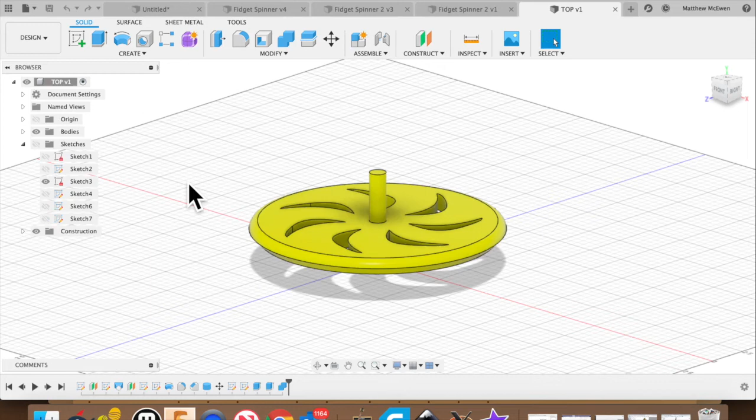Another Fusion 360 tutorial. This is a really pretty simple one as well, using a couple of tools you already used. This is a top, and we're going to produce this in 2 parts.

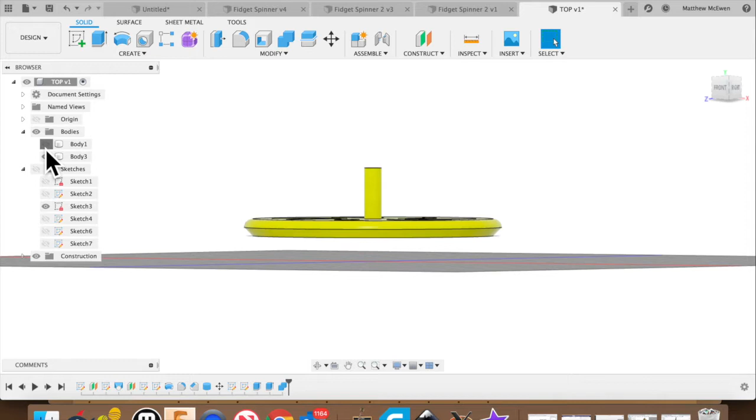We're going to have the tip where it spins, and because we can't print this all at once without it creating a bunch of supports, since it would be floating there, we're going to print this part flat, and then we can turn the tip over and glue it to it. So we're going to print it in 2 parts.

So let's get started. File, new design. Turn on your origins. I'm going to flip it around so I can see the front, the bottom construction plane, and I'm going to start with a cylinder.

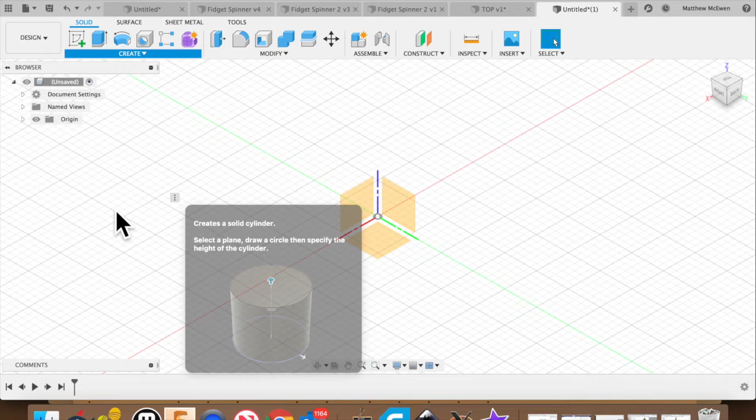There are many ways to do the point, but I'm going to start with a cylinder. I'm going to put it right in the middle, and let's say it is 10, and I'm going to make it a centimeter high too. Say OK.

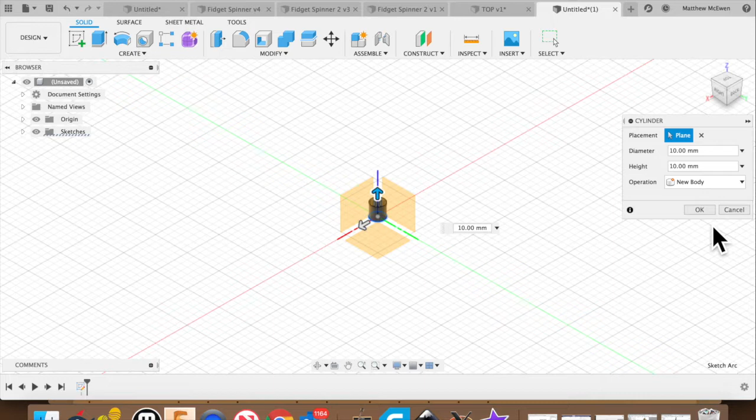Now I don't need my origins right now, I'm going to turn them off. Now this is kind of a way you can trick it. There are many ways to make a point, like a pyramid or a cone, but this would be one of them.

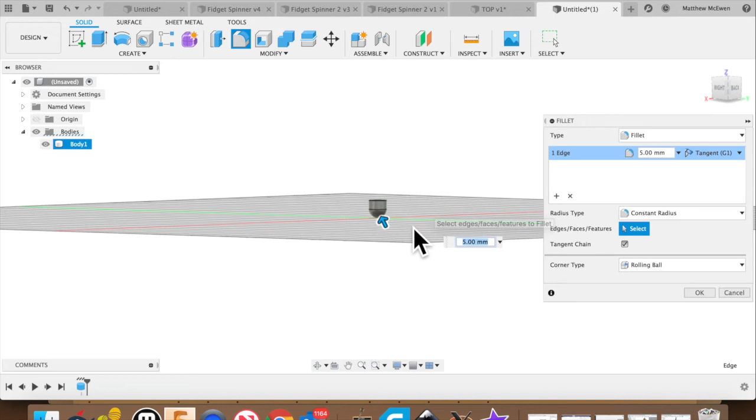You get in there and we'll just fillet it. Oh no, maybe not a fillet. Not a fillet, we're not filleting it. Cancel, we're going to do a chamfer.

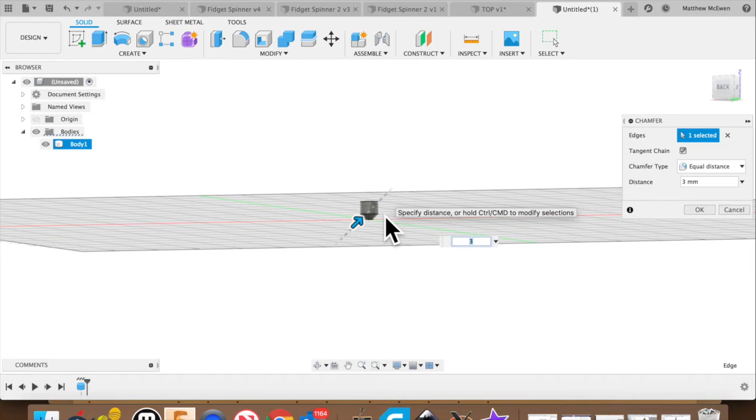Let's try that, let's go into 3. You just have to check, that's not all the way in, gotta get closer, it won't let me zoom in. There we go. So let's try 4, 5, 5 — 5 millimeters on that gives it a nice point.

It's good to go, this piece will glue onto the bottom of that. So the next thing we need to do is create a sketch, and we're going to create the sketch on top of this.

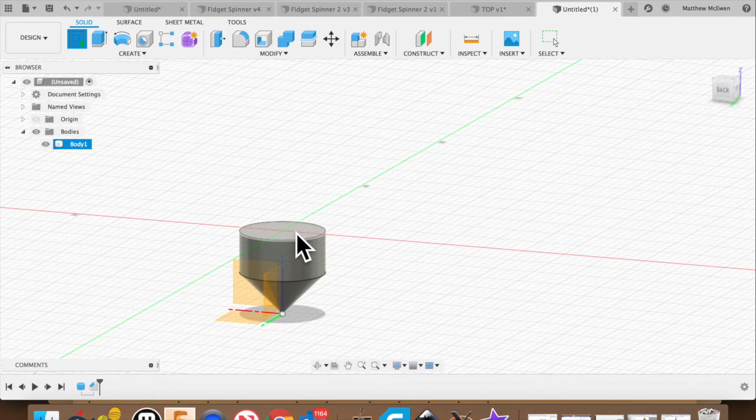Flip me around. You can create a sketch of any type for this top. If you wanted to, you could create a crazy shape, something like that, or just a circle, or a rectangle, or a square. You could draw it freehand.

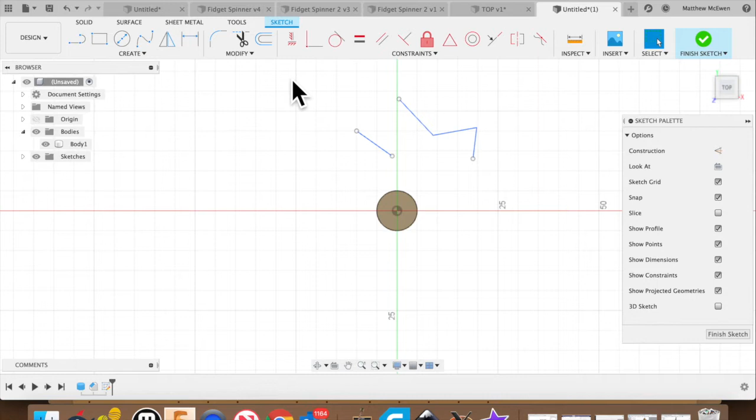The way I'm going to show you how to do it is just doing a circle. Here we go, we come up, let's go out, let's make it 50 millimeters.

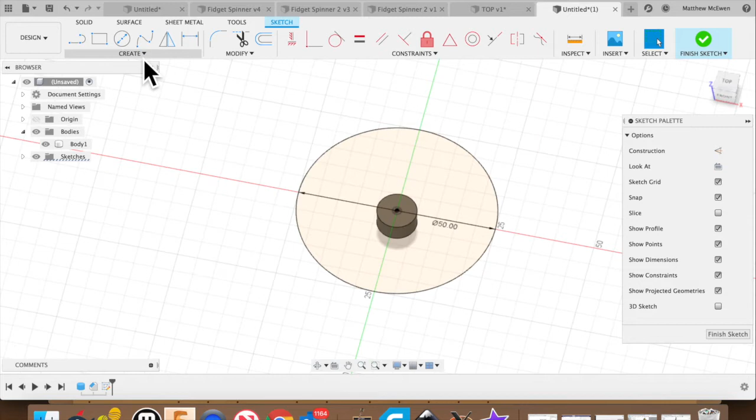Okay, then before I extrude this, I'm going to put some decorations into it using the circle pattern tool. So in my design here, I drew this shape right here, and then I did a pattern just like in the fidget spinner, using this center as the center point. So I'm going to try something a little bit different.

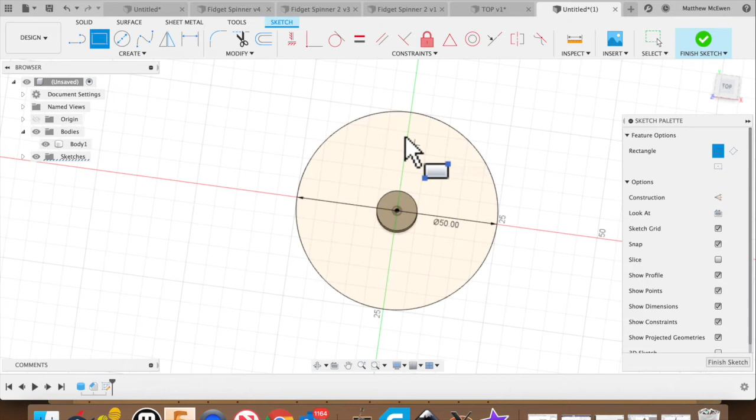Okay, let's try the spline tool, make some interesting shapes, even get it to whistle or something like that. Okay, there is a tool.

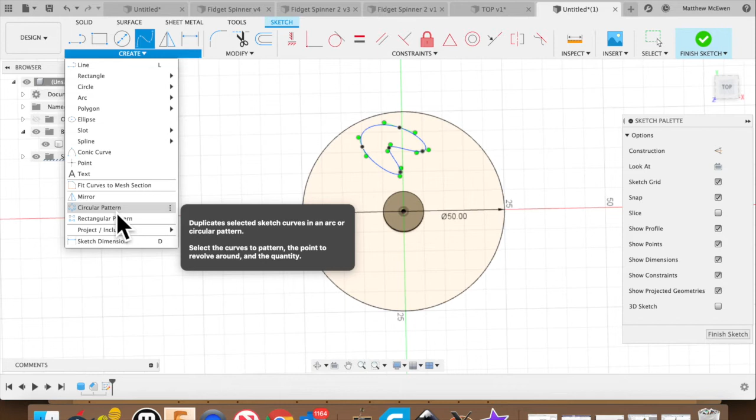You can use ellipses, you can put circles, but we're going to use the circular tool again. Say, hey, I want to make a circle out of that. The center point is right here. If the sketch palette gets in the way, just put it over there. That's 3, that's 4, that's 5, that's 6. I don't want to put too much, but let's go with that.

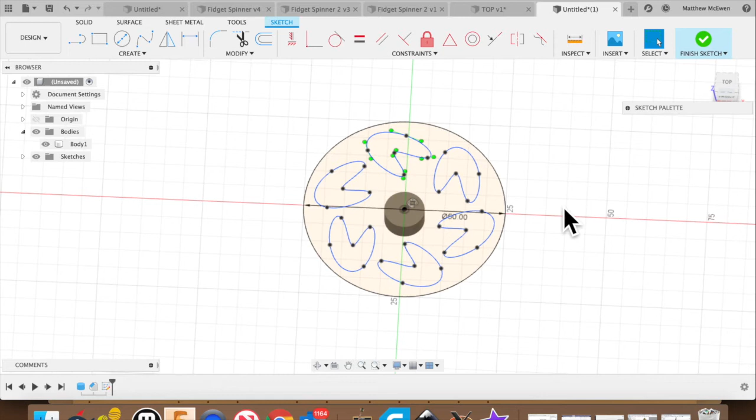Now I can exit the sketch, and I can click the middle and just use the extrude tool. Let's bring it up 5 centimeters or 5 millimeters.

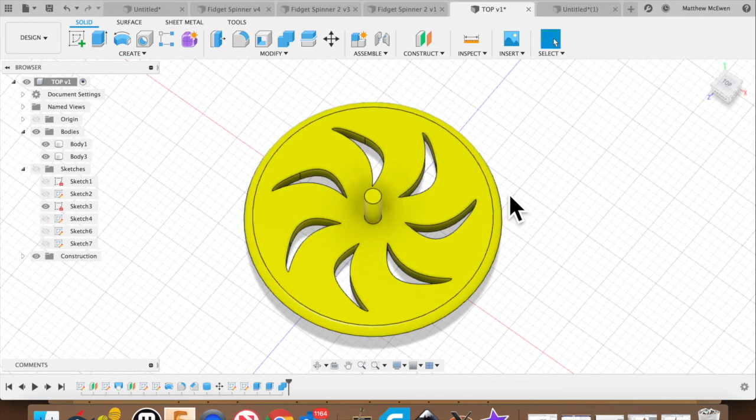I think that's actually a little bit bigger. Okay. I'm going to double click on the extrude and say 3, make it a little thinner.

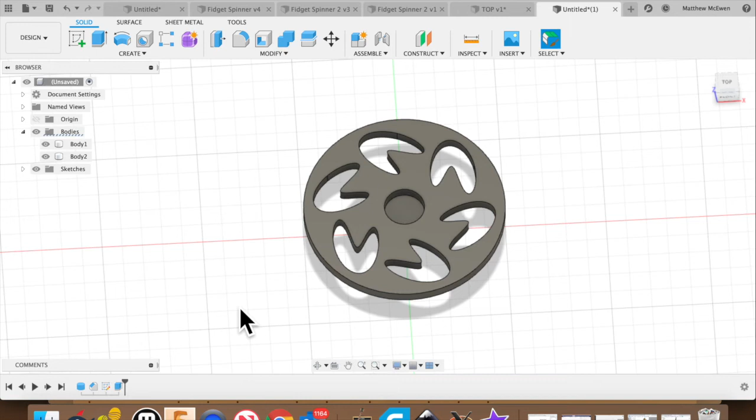Okay, that's a little bit better. Oh, I forgot to extrude the center, so I'm going to double click on that, bring it back up, and just in the profiles I'm just going to include that one.

Okay, I want a new body because I want to be able to print it. I could fillet or chamfer the edges if I wanted to make them a little bit more smoother.

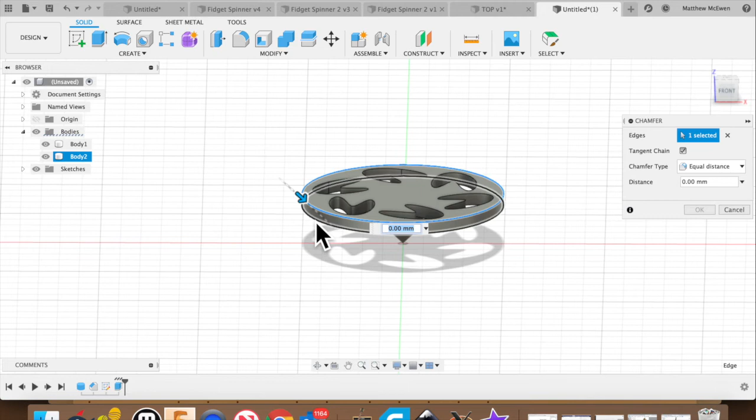Let's go in 3 and see what it does there. Oh, that goes in way too much. So I'll go to 2, 1, 1. So you just play around with those numbers.

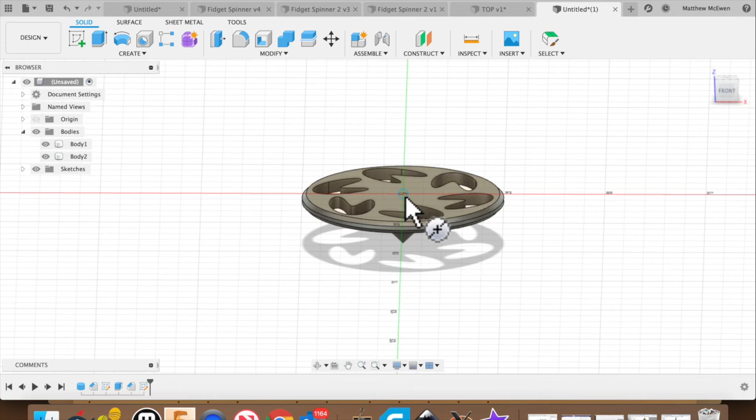And the last thing I do is I could either draw the spinning part, or I could just do a cylinder on the top here. This thing maybe 3 millimeters, and I'll make it a little bit bigger, centimeter line.

Okay, so if you want to modify it, remember you go into the appearance and you duplicate these, and then you can change the color. Done. Let's see if I make it pink. Here we go.

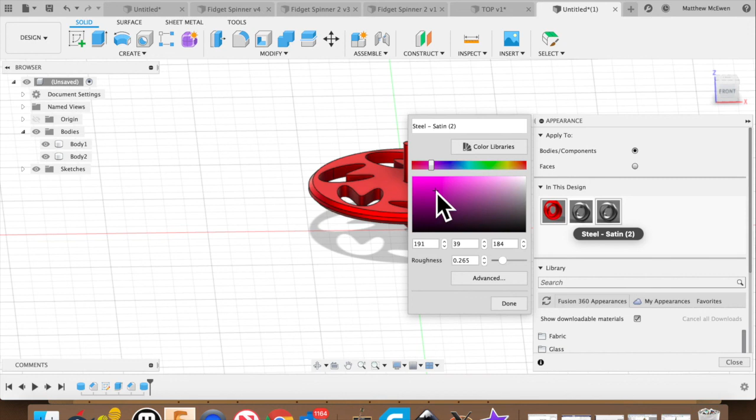Done. Since this is a different body, you can throw that in there. And I basically got 2 bodies. I got the top part in this that we can print very easily, and this one we can turn over and print very easily. Thank you very much.